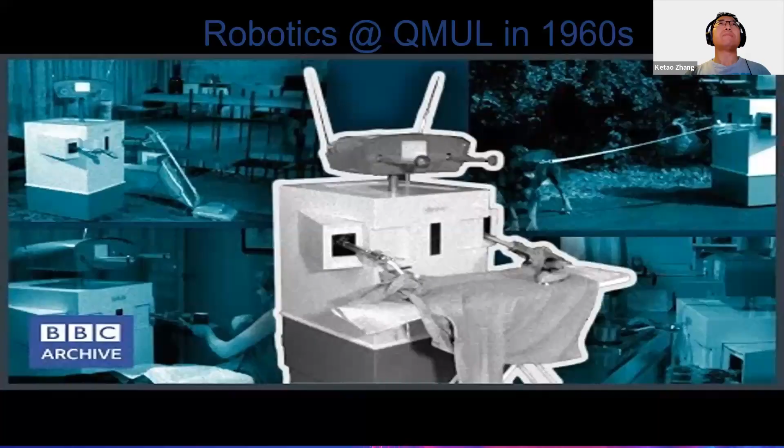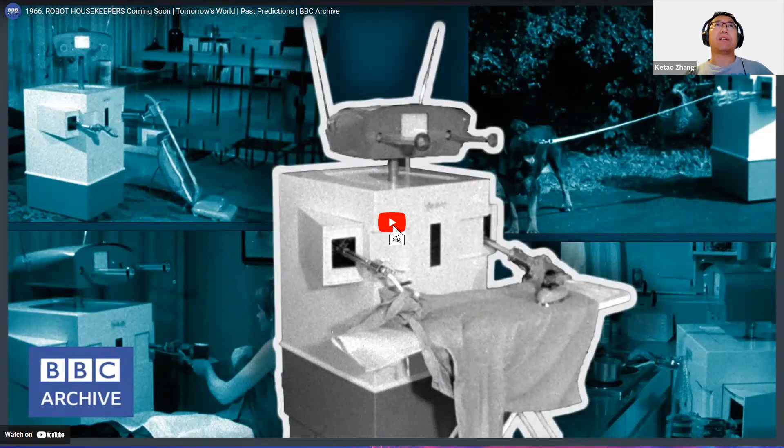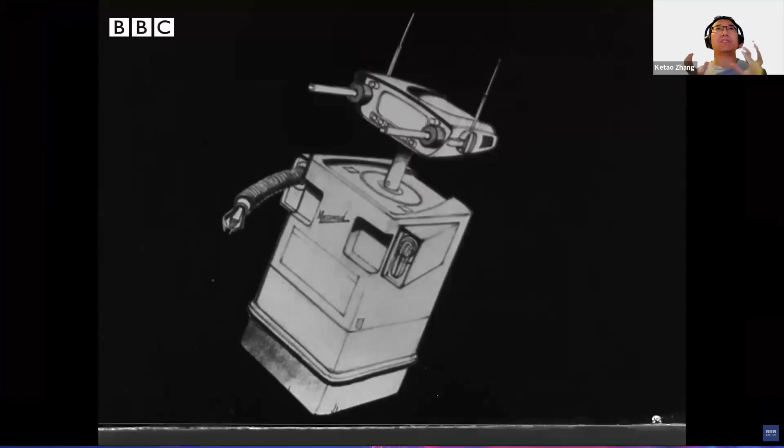Before talking about modern robotics at Queen Mary, I would like to share a video showing some segments about robotics at Queen Mary in the 1960s and 1970s. I'm not sure whether you can hear the sound, but this video shows a housekeeping robotic assistant, which was proposed as a concept in the 1960s, named Able Mabel.

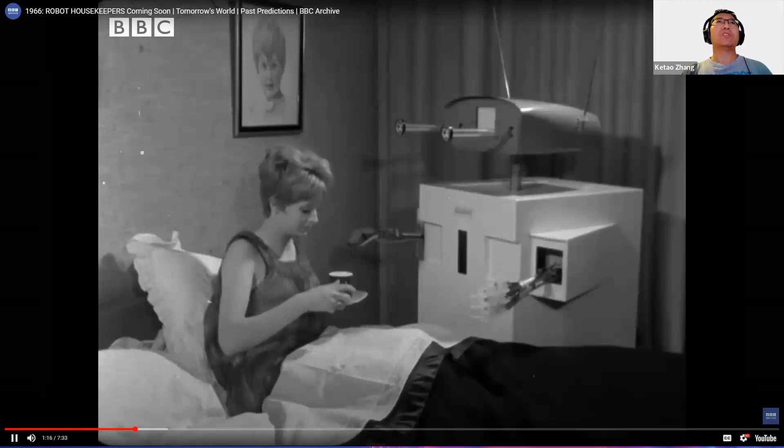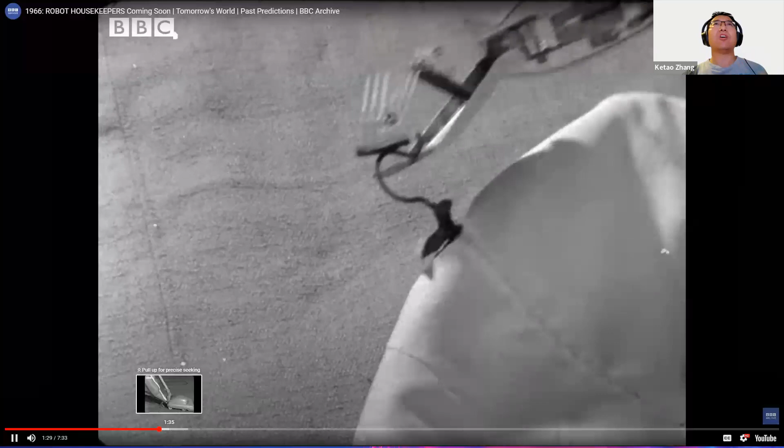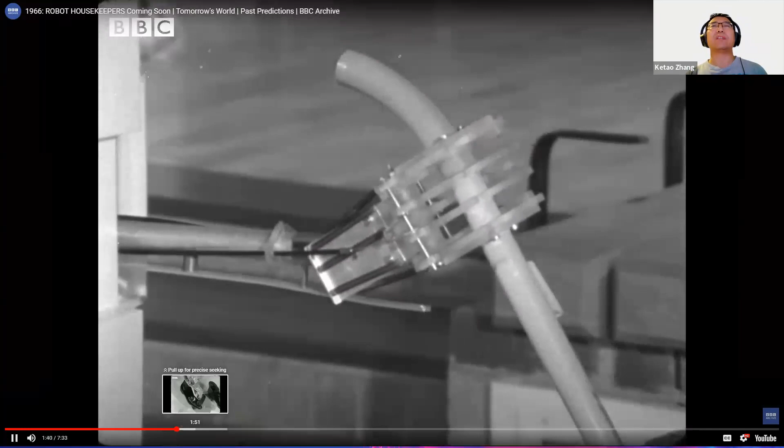This robot was proposed to be able to serve people coffee, and also do home assistance work. You can see this robot vacuum the floor, though it's using a traditional vacuum machine. Nowadays, you may already have a robotic vacuum purely designed for vacuuming floors in your home.

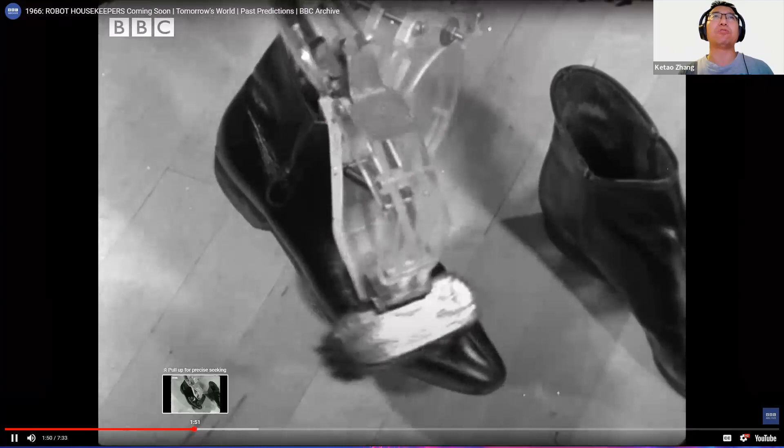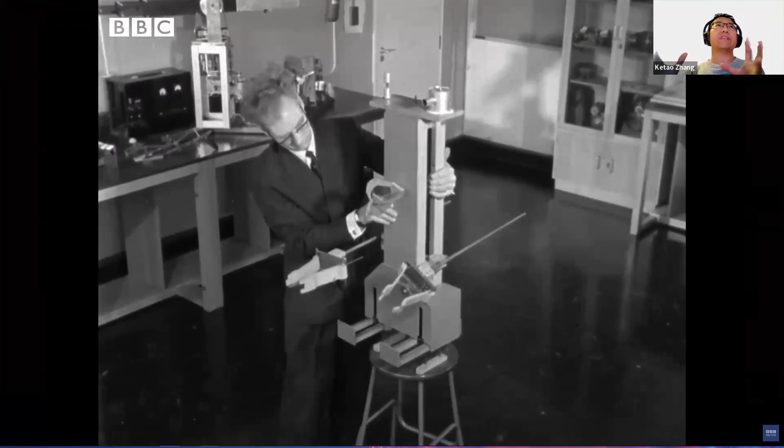But what I would particularly like to introduce is this part - jumping a little bit to introduce our professor, Professor Thring, who was working in the engineering building where our current robotics activities are actually based.

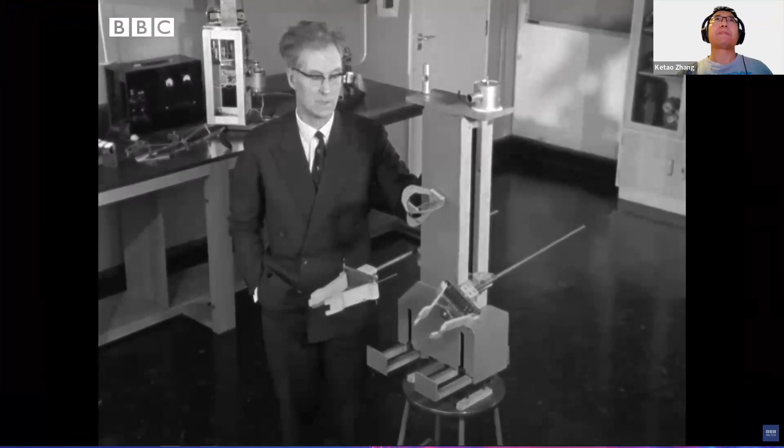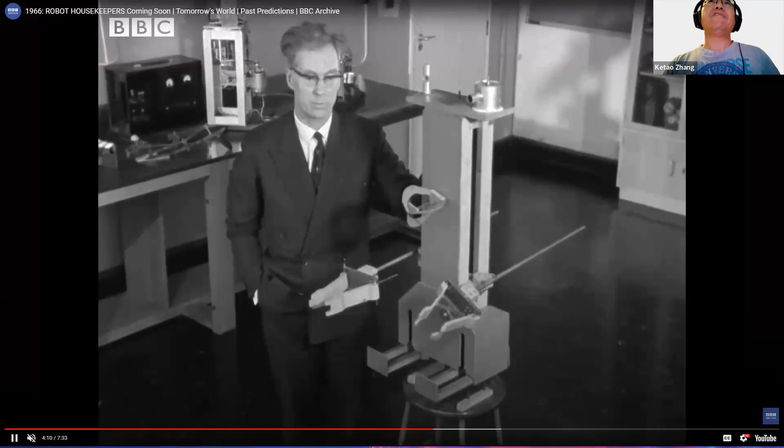Here the professor was showing a half-scale model of a robotic assistant with robotic grippers, and as he was saying, the robot should have a computer - which, from my point of view, was already very advanced conceptually, because at that time computers were not as good as what we have today.

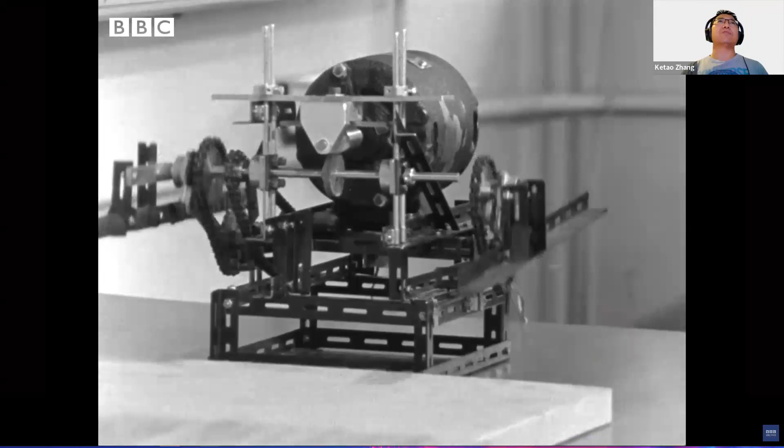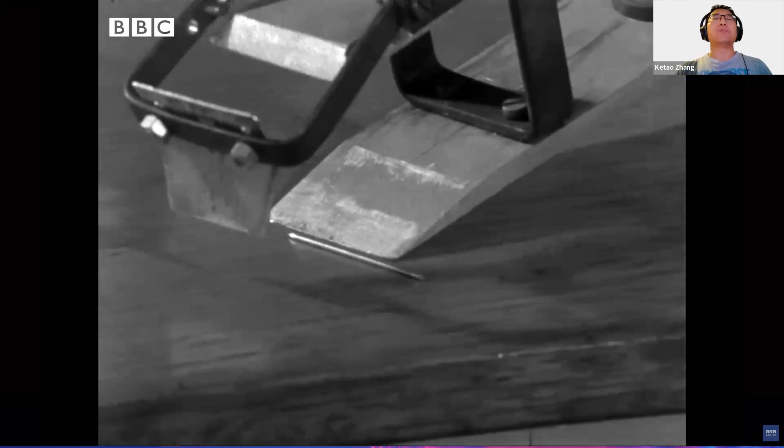Here he's showing another prototype, a stair-climbing robot, which was designed to help people, for example, carry someone who is unable to move or climb stairs. So that's the history about robotics at Queen Mary.

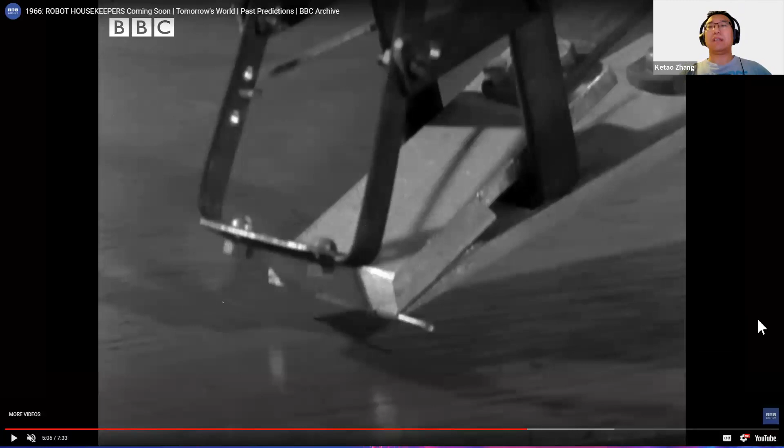Now let's move to modern robotics. The key message we take away from that video is that a robot should have a computer, and also action mechanisms. Let's move to the next page.

From that key takeaway message, we can see why at Queen Mary robotics engineering is supported by 2 schools under the Faculty of Science and Engineering. These two schools are SEMS and EECS, because SEMS focuses more on the action mechanism, with expertise allowing you to understand the action mechanisms of robots. From EECS, we have colleagues specialized in computer science and electronics who will help you understand more computer science related aspects of the robotics discipline.

We also have associate members from medicine and biology, all coming together to support multidisciplinary research in the robotics field. As robotics is a multidisciplinary field, we have members specialized in a diverse range of areas, including mechatronics, control, vision, electronics, biomechanics design, as well as people in biology, behavior, and biomechanics - all coming together to fulfill the requirements to deliver the multidisciplinary subject of robotics.

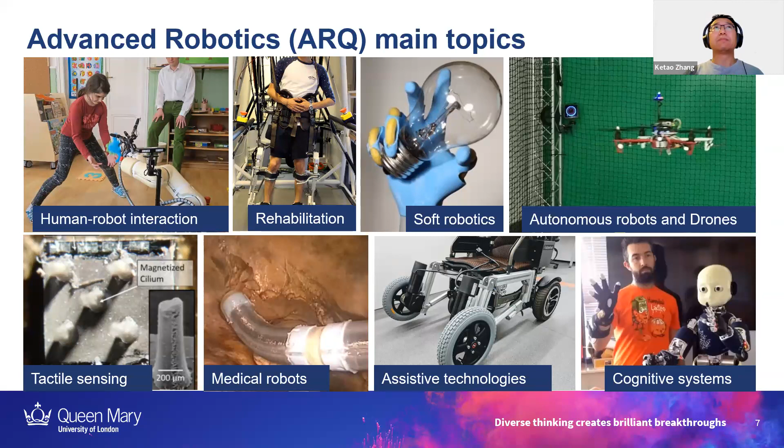So one question you may ask is why should you learn engineering, why come to robotics engineering. There are several main reasons. First, engineers are in demand. Second, engineers are paid higher salaries compared to other graduates - the average salaries earned by fresh graduates.

Especially for robotics engineering, you will cultivate skills in project planning, problem solving, and creativity activities through different modules, along with communication skills and specialized expertise in robotics related subjects. So you will have higher employable opportunities during your career when you finish your robotics engineering program.

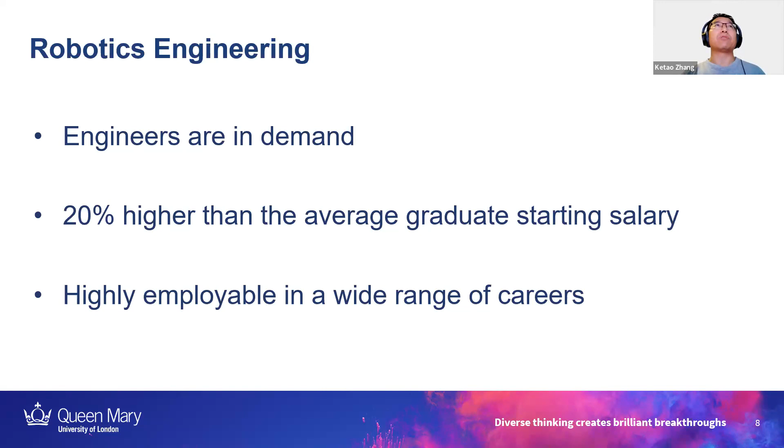Here are some numbers I extracted from the website published by Engineering UK, published in May 2023. We have about 6.1 million people working in engineering and technology related positions. This is about 19%, or roughly 20%, of the whole UK workforce. So you can see how many positions are provided for engineers.

About 25% of all jobs posted in the UK are in engineering and technology. So that means we have a huge number of requirements for engineers.

So you may ask, what exactly is robotics doing? What is robotics? Robotics is a sub-discipline of engineering, and it's also a multidisciplinary subject, because now robotics is expanded not only as an engineering subject, but also covers computer science.

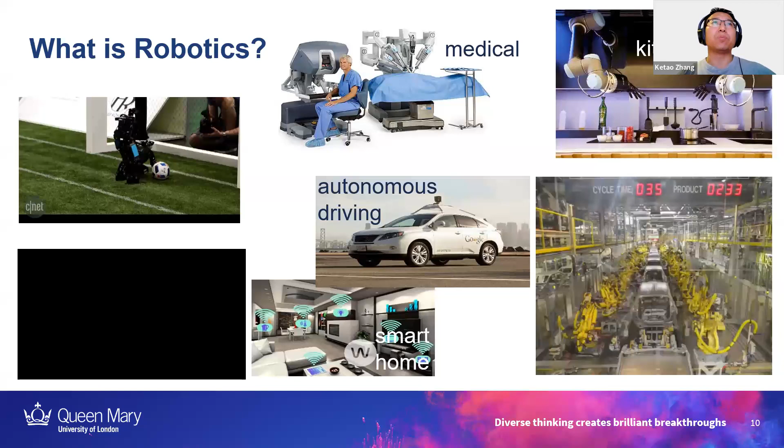For the future, you will see more autonomous driving cars - you may already see some on the streets. You may also live in a smart home with a number of autonomous or robotics technology-based equipment.

When you finish your robotics program, you will have a bright future in your profession. Because you learned the skills to build robots and the knowledge of how to use robots, you will be able to select different careers - as an engineer with a background in mechanical or manufacturing technologies, or as an electronics engineer with knowledge learned in the electronics engineering field.

You will also touch on computer science, one of the most popular topics we talk about - for example, AI and machine learning. That all comes from your modules related to computer science.

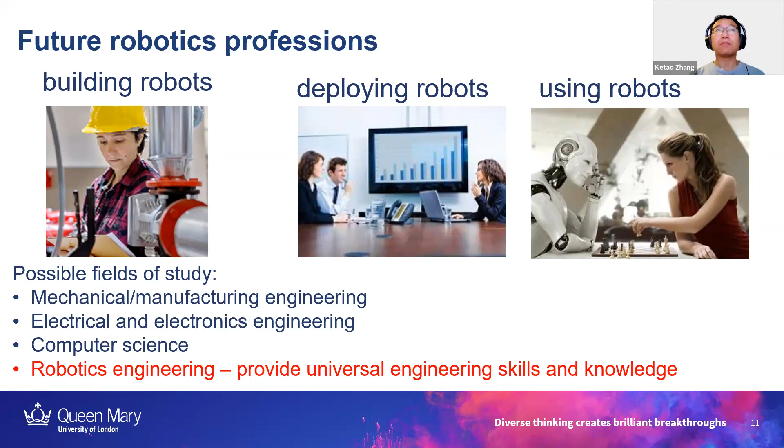So why I will persuade you to select the robotics engineer program at Queen Mary, or what are the exciting points of this robotics program here. First of all, it's a complete undergraduate program in this subject, the first ever in any of the Russell Group universities in UK.

We offer that, and we have invested over 5 million pounds to improve the facilities and prepare everything for the teaching activities for our undergraduate students.

As I mentioned, Queen Mary is one of the Russell Group universities which has heavily played in this area, with a lot of contribution in research. In the recent Research Excellence Framework carried out in 2021, we are ranked joint 7th in the UK for engineering, meaning we are in the top 10 of UK universities delivering engineering subjects.

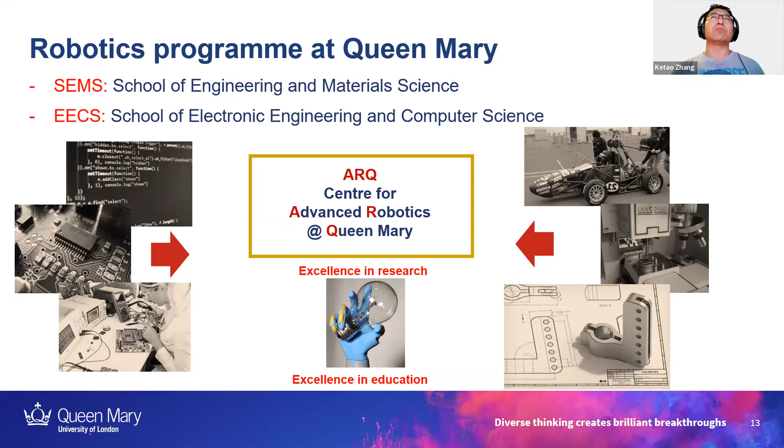Overall, the robotics program at Queen Mary is delivered by two schools, including SEMS and EECS. You will learn knowledge related to computer science, for example programming and electronics, and you will also have the opportunity to learn engineering design and experiments, and to attend societies such as the student F1 team, which is supported every year by SEMS.

Now about the facilities, where we invest a huge amount of money.

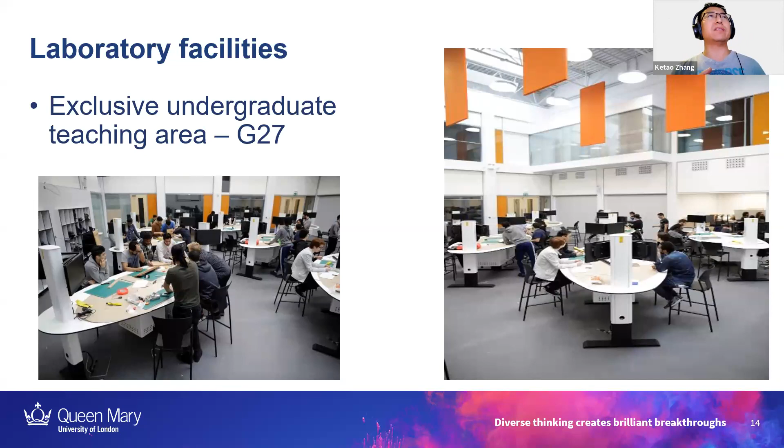One of the facilities is the undergraduate teaching area, which has adjustable tables and monitors assembled, with computers prepared so students can sit together to discuss problems in groups and work on their coursework and other student projects.

We have the advanced robotics lab, where PhD students work on their research projects, and our undergraduates can also join them working on their final year projects.

We have a drone flying test lab, and we have a maker space where students, after training by technicians, can use the tools and materials to carry out their own projects.

Undergraduate students in robotics also have access to the electronics lab, which is based in the School of Electronic Engineering and Computer Science.

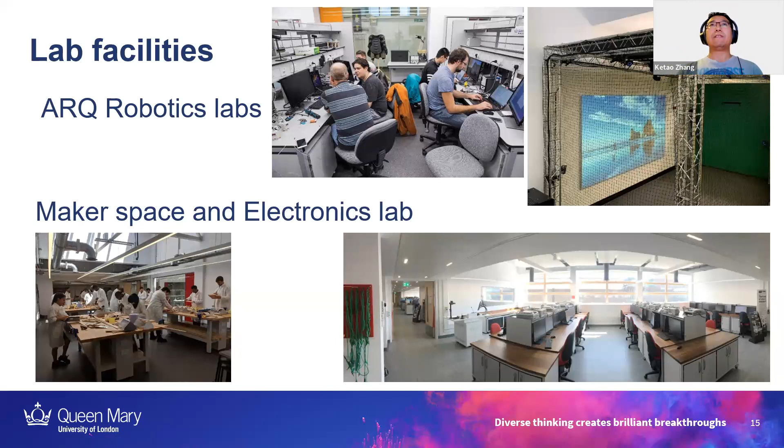For advanced, state-of-art equipment, we have, for example, robotic hands, 3D printers, assistive devices, mobile robots, drones, and robot arms, where our students can work on their projects in the final year.

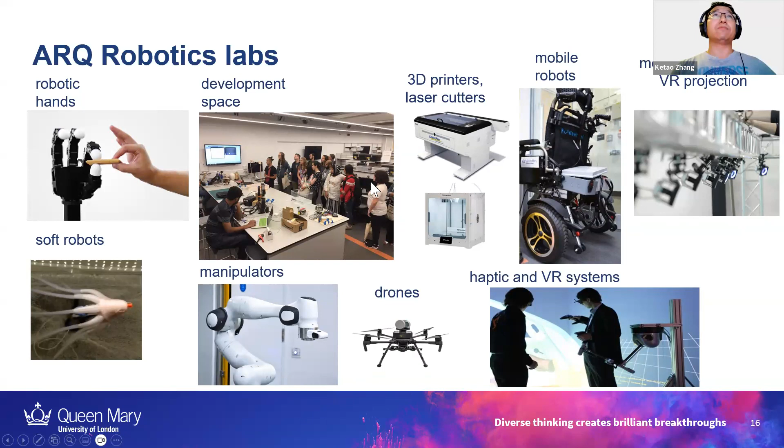In this undergraduate robotics engineering program, we also offer students the opportunity to go abroad for one year. This allows you to meet many different kinds of people, manage life and study abroad successfully, and enjoy independence compared to studying in the UK. It also broadens your intellectual horizon, letting you experience different environments and learn more about other cultures.

For example, if you go to the US, you may learn some modules that are not provided in a UK degree.

It can also increase your chances in the job-hunting stage. International experience enables you to stand out in the employment market, because students with international experience can demonstrate they are willing and able to learn in a different environment, with different skills acquired from the year abroad. Many of our students also develop a network of valuable international contacts.

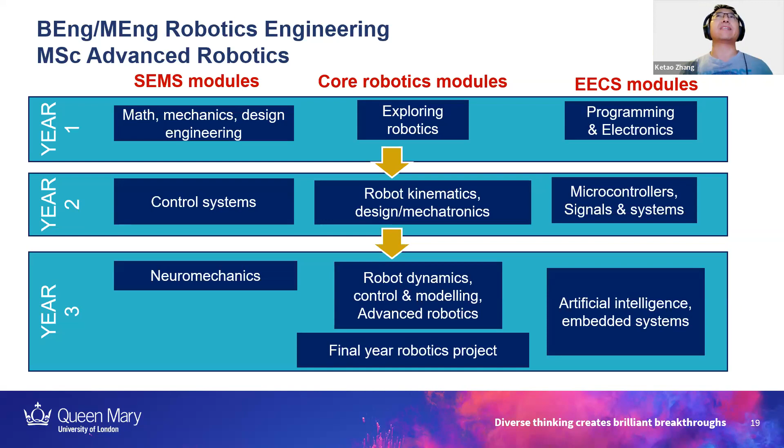For a typical week, every term or semester you are going to take 4 modules. Each module has 3 to 4 hours of teaching, so that means about 15 to 16 hours of lectures, including 4 hours of problem solving classes among these 15 hours. Then you will have about 14 hours available for lab work and revisions. Normally we keep Wednesday afternoon free for other activities, including sports or other social network activities.

For each module, there are several different types of assessments, including for example learning engagements, which are checked along the teaching throughout the entire term. There will also be coursework reports, mid-term exams, or final exams. This depends on the setting of the modules, but most modules have only 2 elements you need to complete.

This page gives you an example of the module. Sorry, I'm not sure if this screen is still sharing. Okay, we can still see your shared screen. It's on the module example. Okay, cool, thank you.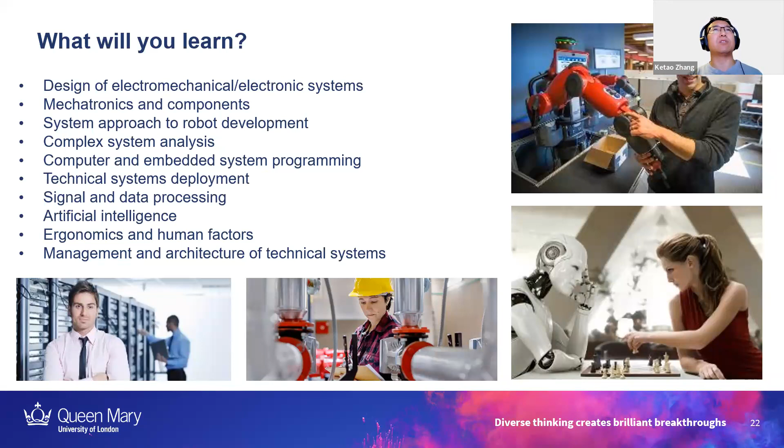And you will have a little touch on artificial intelligence in the final year, and also on ergonomics and human factors. Through all the years, you will gradually develop knowledge regarding the management and architecture of technical systems.

So what kind of skills will you develop? You will develop skills in making controllers and electronic components, and have huge opportunities to develop your programming skills using different languages, for example Java, C, and Python. You will also be able to use software to do mechanical drawing and manufacturing, for example using a 3D printer, and develop skills in human-machine interface. All this diverse range of skills will be unique to our robotics students.

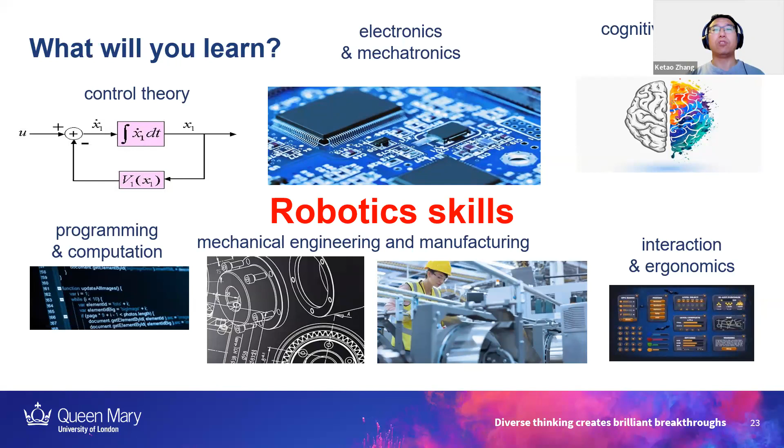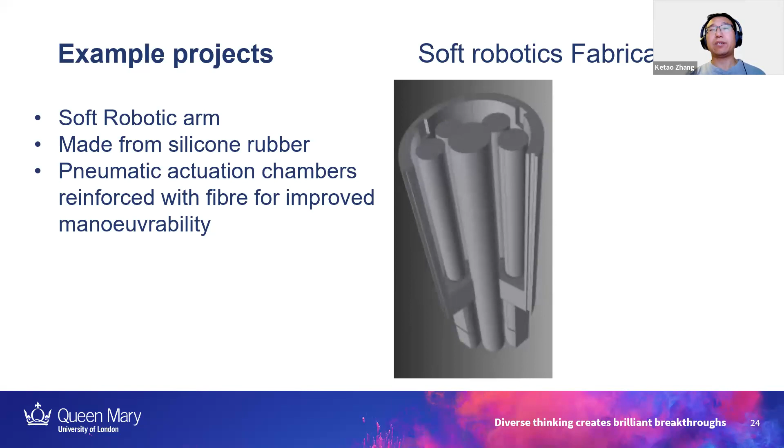In the final year, normally you will do a final year project. From this year, all the students will do a group project, but they need to finish their own individual tasks. For example, in previous years our students did soft robots, developing robotic devices made out of soft materials.

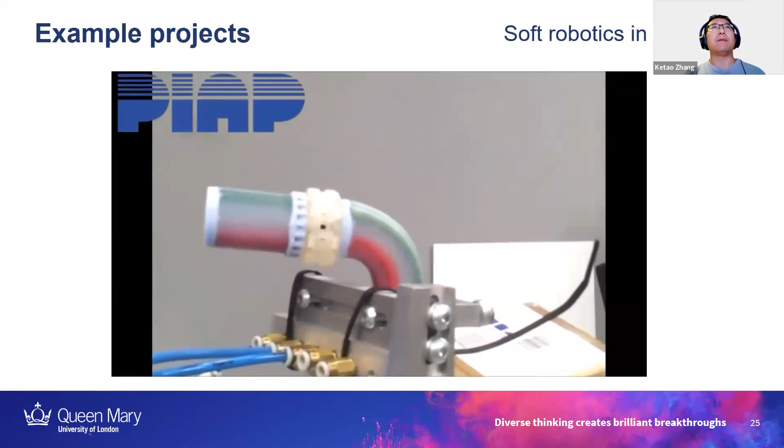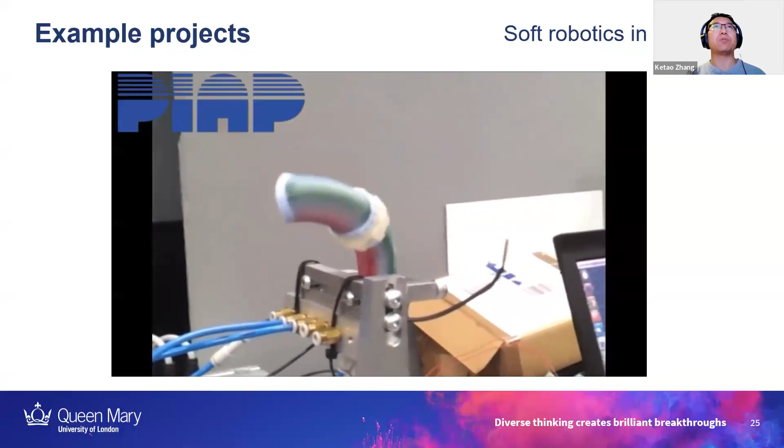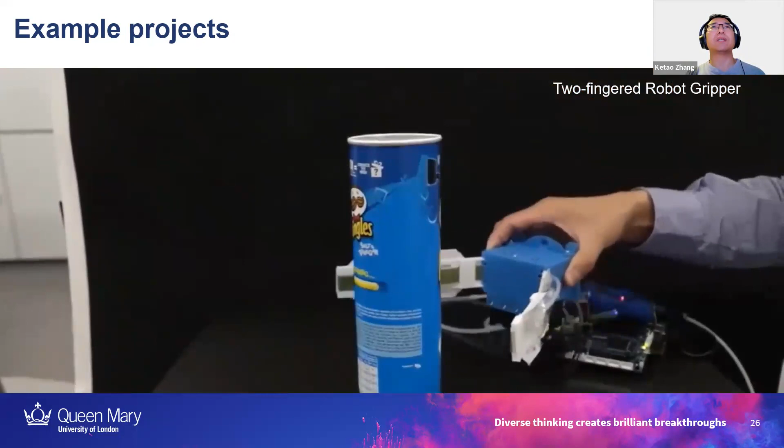For example, after assembling two segments of the soft elements, the robot can implement certain tasks or dexterous manipulation. We also have our students develop variable soft grippers with variable stiffness fingers, which can be used to grasp objects with different shapes or made out of different materials. It can adapt to a cylinder, and as you can see in the previous grasping test, it can also adapt to a rectangular or cubic shape.

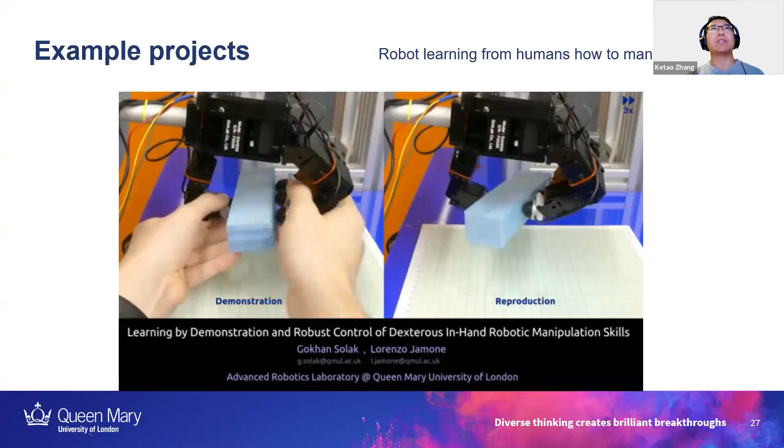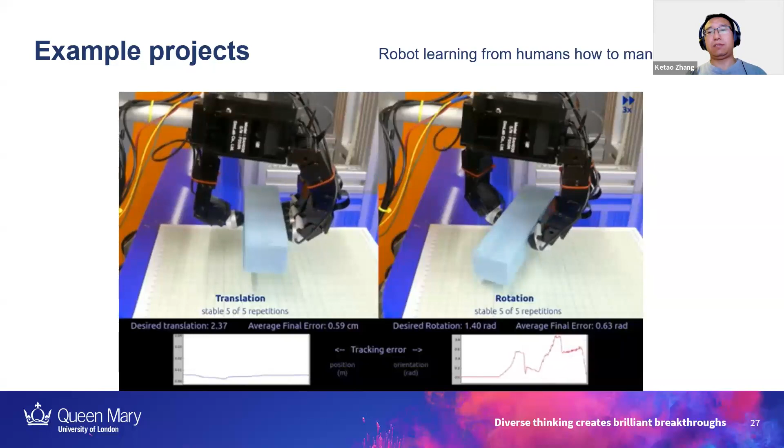Regarding some of the work done related to electronics, here students use a tactile sensor mounted on a dexterous robotic hand, which can assist the robot in implementing grasping and dexterous manipulation, like what our human hand is doing.

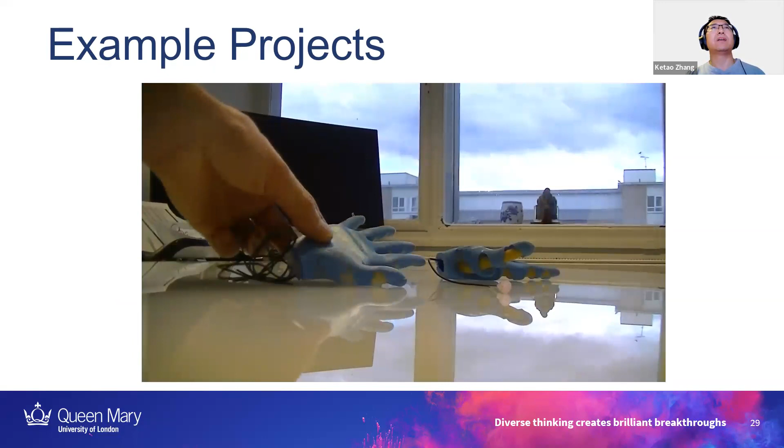And also prosthetics. Here is a complete soft robotic hand made out of silicone material, with no electronics, purely powered by compressed air. For example, you can use a syringe to generate pressurized air, and when you inflate it, you can see the fingers bend. This robotic hand is the size of a 5-year-old child's hand.

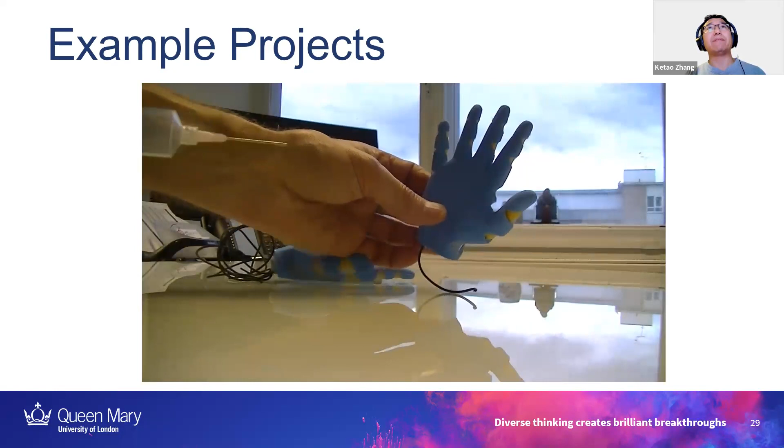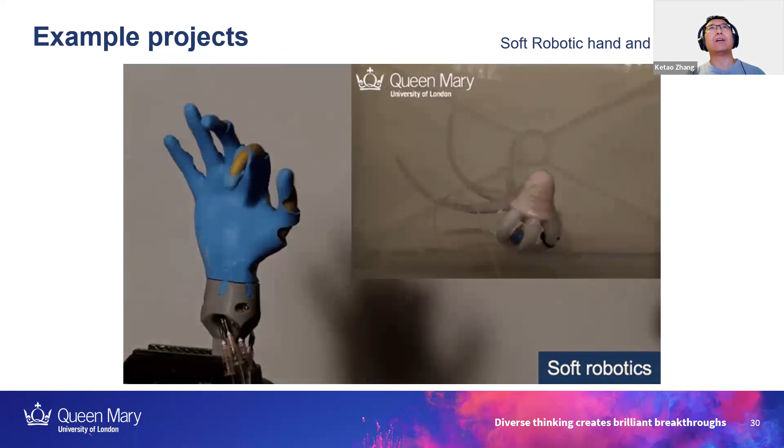And so here you can see the actions, dexterous actions of the robotic hand, and also our customized engineered soft squid.

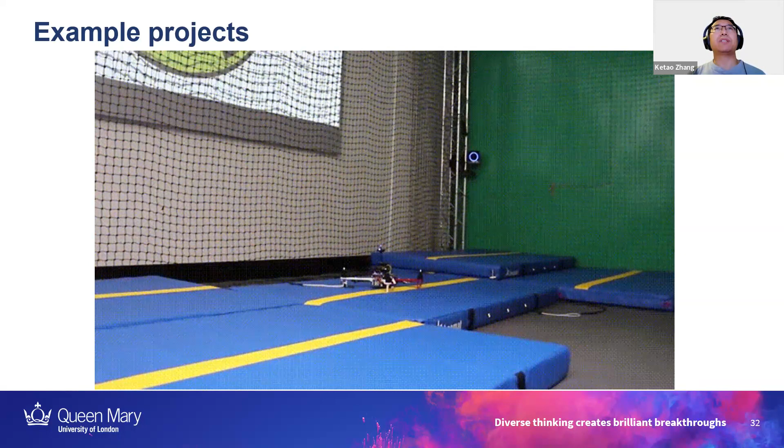Here's another project that also involved our undergraduate students. We have drones that can act autonomously, tracking trajectories. These were experiments done in the drone flying space, which is called Q Arena.

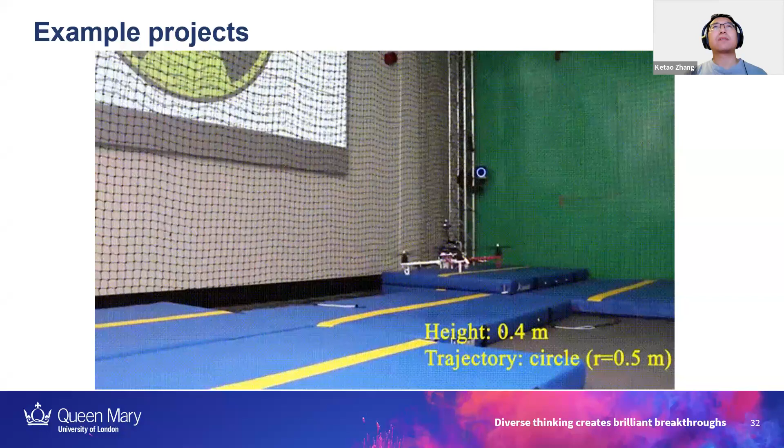As I mentioned, you can be an operations engineer, a design engineer, a systems engineer, or even go into computing, IT, or IoT software engineering. Because of your skills, you can adapt to the requirements for this diverse range of jobs as an engineer.